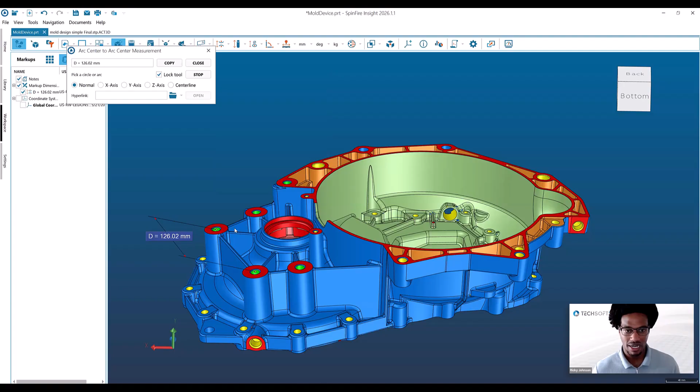So we'll start off with one of these and show how it works in SpinFire Insight. I'll do arc center to arc center. What's nice about this is that SpinFire Insight identifies the different arcs that you're hovering over. Then all you have to do is point and click to place a markup or annotation on your view, and you can do that in several locations to place whatever measurements you need.

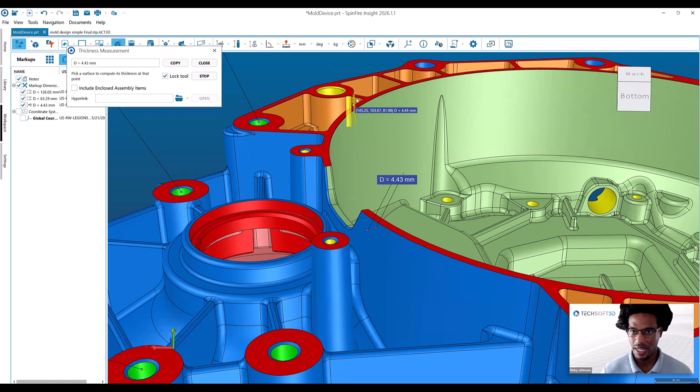Additionally, there are different operators that exist here as well that you might find interesting, such as thickness. With this, SpinFire Insight identifies parallel walls and automatically produces that distance for you. As I quickly navigate around, these numbers change to reflect what I'm currently showing, giving you a way to quickly interrogate your model without much button clicking or anything like that.

Now we have a few different annotations present on our view. What I'd like to show you is that SpinFire Insight is very configurable when it comes to the data that gets displayed within your model. Right now we're in millimeters, but you can quickly switch to inches or to other units if you'd like. You should notice that SpinFire Insight allows for mixed dimensioning, so even though these appear in millimeters, you can also show this in inches, which makes it really convenient.

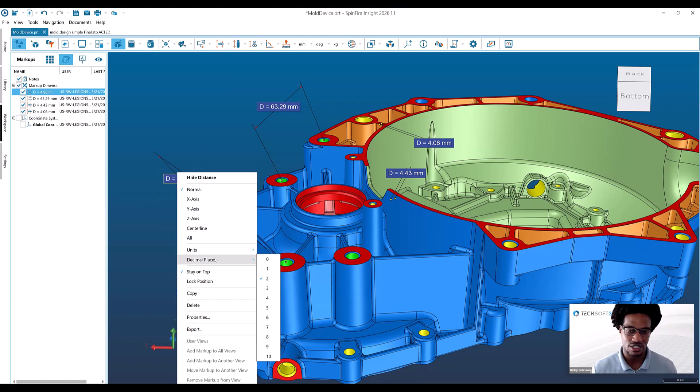Additionally, you can also change the amount of decimals that are shown. One thing I'd like to point out is that changing the decimal resolution doesn't modify the model in any way—it just influences how the data is shown on your screen. So no worries about model manipulation or changing your model in any way with SpinFire Insight.

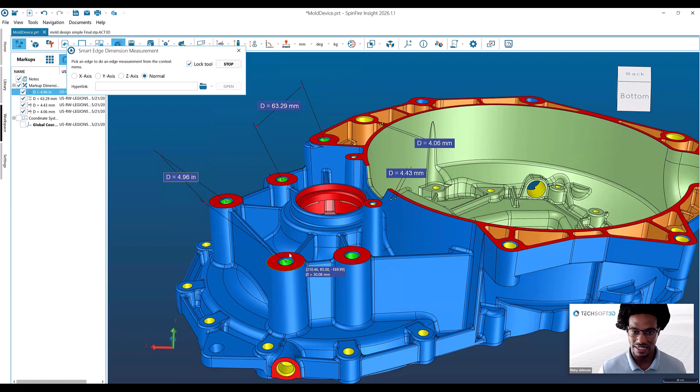One additional thing I like to show is, as we talked about how it progresses from more basic functionality to a little more advanced, I'd like to show this smart edge dimensioning. Very similar to the thickness tool we used, SpinFire Insight identifies these edges for you, and for whatever edge you'd like to show within your model, SpinFire Insight automatically identifies that and allows you to place that dimension on your screen.

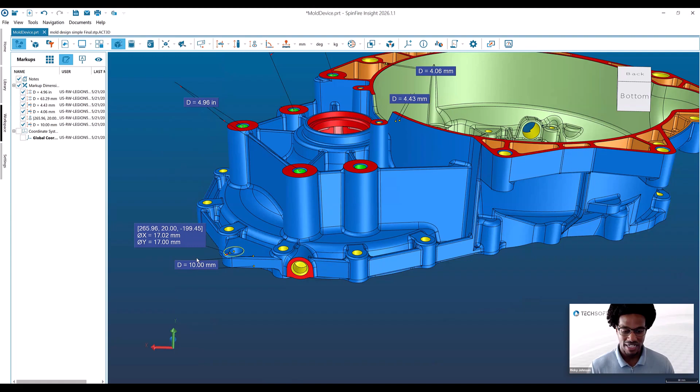So I'll just place a couple different dimensions, and also I'm going to do another thickness analysis here. Again, SpinFire Insight makes it really easy to share data amongst team members.

It also allows you to add different markups. So let's say that this thickness falls outside of our tolerance, we can specify that—falls outside of tolerance. Sorry, I spelled that wrong, but I won't correct that right now.

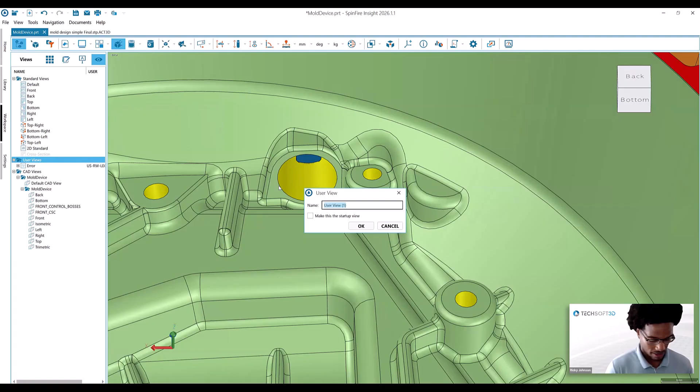What it allows you to do is specify different user views. So if you wanted to send this off to manufacturing or your designer, you can just create a new user view—we'll call that 'error' here. Then we'll navigate to a different location, and let's say we want to create a user view here as well, and we'll call this 'up to spec.'

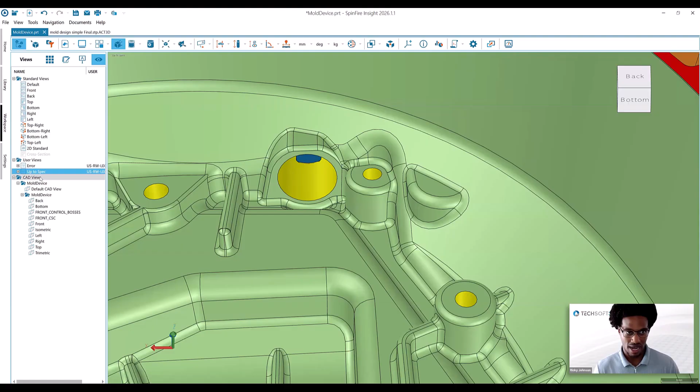Then all you have to do is save this file as an Act3D file, which right now is a PRT, but when you save it as an Act3D file, it's SpinFire's proprietary file format. You can send that off to a colleague, and all they have to do is navigate to these different user views, and they're quickly teleported to that view you'd like to specify. This eliminates a lot of miscommunication opportunities—you can give them the view exactly where you need them to be looking, eliminating some of that potential error.

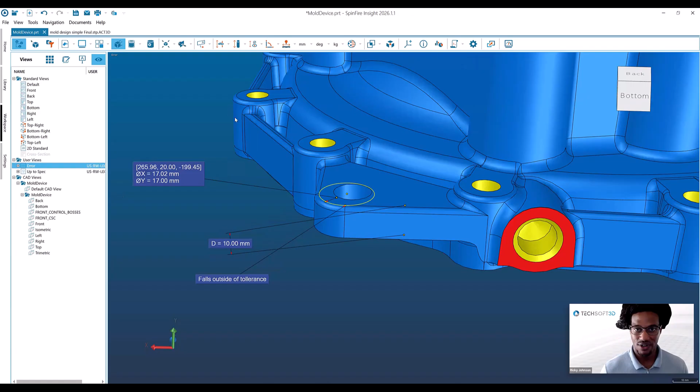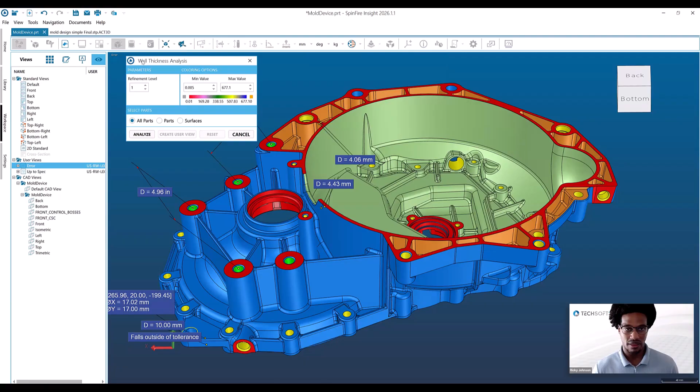To illustrate that a bit further, before I navigate to a new model, I'd like to show one more capability within SpinFire Insight. I talked about some of the measurement capabilities we have already, but SpinFire Insight also has a lot of different analysis capabilities, such as model compare, draft angle analysis, and wall thickness analysis. As you can see, we have curvature and rule-based coloring as well. I'd like to show this wall thickness analysis really quick—this is another way to visualize your data without needing to interrogate things individually.

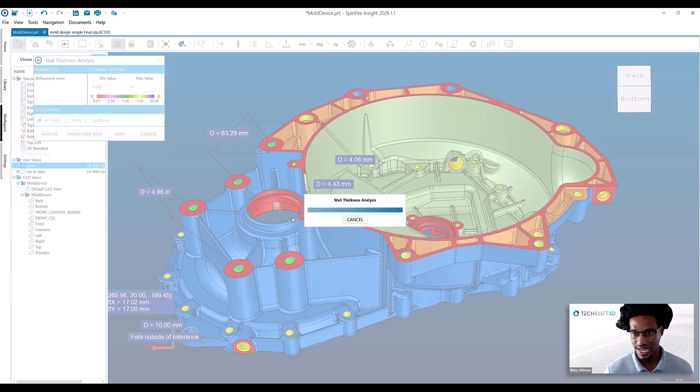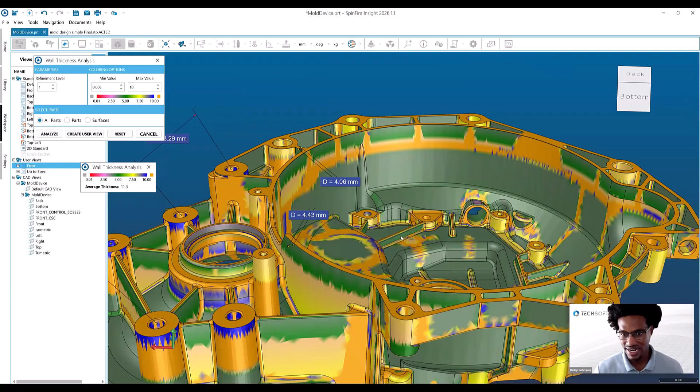This gives a very colorful way of showing your data, which can be really useful for any non-technical members of your team. It's a quick and easy way to visualize this. Once it finishes, you can see a legend pop up that lets you know the wall thickness and what color represents that thickness. So as you can see, we have some green around 5 millimeters, some orange that falls outside of our 10 millimeter window, and other colors as well. Again, without needing to be very good with SpinFire Insight, you can get a quick and comprehensive visual of some of the data within your model.

So I'm going to stop that and navigate to a different model. I mentioned how SpinFire Insight makes it very easy to share data amongst all levels of members of your team, whether engineering, executives, product manufacturers, or anything in between, without needing access to CAD licenses. This is a file that my colleague actually made.

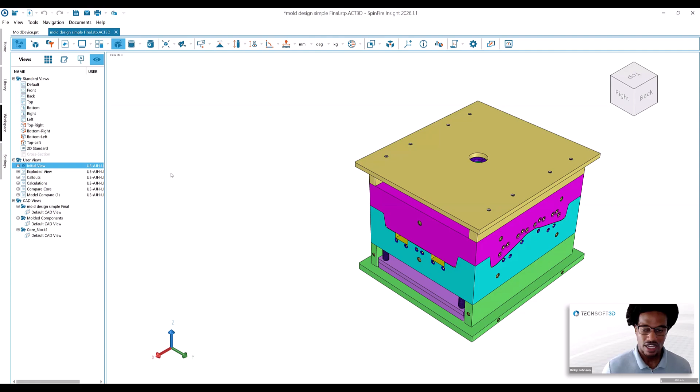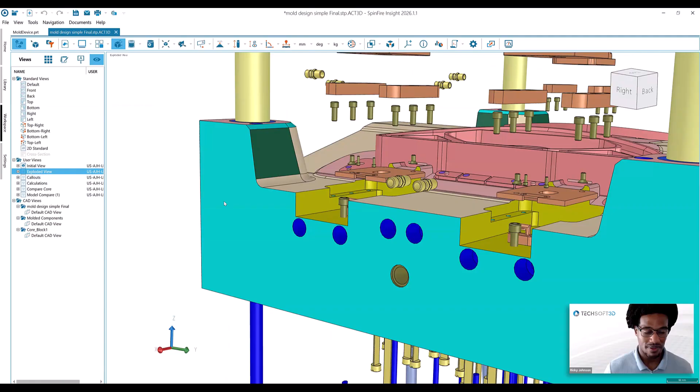He just saved it as an Act3D file and created these user views. I'd like to show some of the power of those user views and how they can be used to share data. Right now we're in our initial view, but I can go to this exploded view, and as you can see, it gives this nice exploded view, which I can then analyze myself, identify how things are put together, and interrogate my model without needing to do any manipulation myself within SpinFire Insight. That makes it really nice for people who aren't very good with CAD systems—as long as you can click a button and click between these user views, you can use SpinFire Insight to see the data you need.

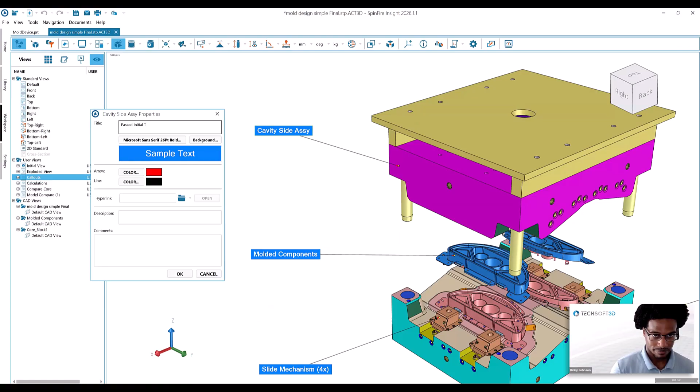Another nice thing is my colleague already created these markups, but you can go into the properties and relabel this. So we'll call this 'pass' — we can specify something like this passed initial testing, or whatever we might need to do. When we save this file and send it back, this callout will now be reflected with what we currently updated it to. I'll navigate back to our exploded view and go back to our callouts, and now you can see that it's reflected how I've updated it.

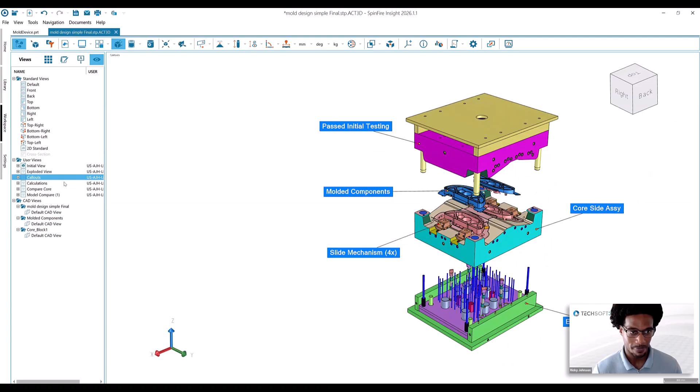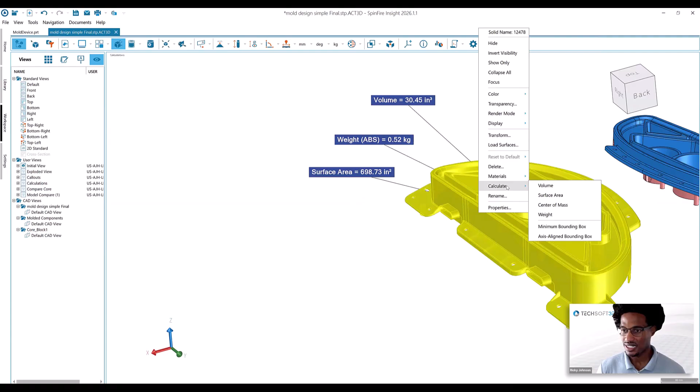Additionally, SpinFire Insight is capable of doing various calculations. You can right click, and within here you have different materials available. So if you'd like to calculate weight for a specific material—let's say this was made out of aluminum—you can do that very quickly. Additionally, there are different calculations available, such as volume, surface area, weight calculation, and more.

I'm kind of running up on time, but I'd like to show you a couple more things before I get out of here.

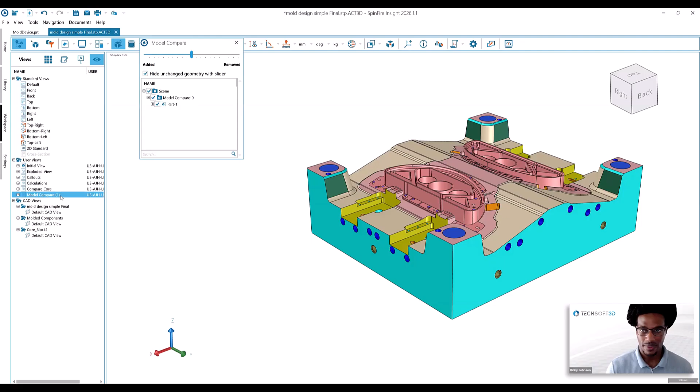Model comparison is also another very nice feature within SpinFire Insight. If you have version control for the models that get created, this model comparison tool is a great way to visualize what's changed between version 1 versus version 2, etc. Rather than running this model comparison myself, I'll show a different user view that already has model comparison enabled. That makes life very nice for sharing data, because whoever you're sharing it with doesn't have to implement this model comparison themselves—it makes it very easy for people to visualize without being very good with SpinFire Insight.

One last thing to show are these CAD importer settings. Depending on what type of data you're working with, we have presets available that work for different model types. For example, quality is basically as high as we can go, and it's recommended for small to medium models—so if model resolution is really important to you, you might load it in quality. However, if you're working with a very large model, performance loads minimal geometry and is recommended for very large models. Regardless of what type of models you're working with, we have presets available that are just clickable and easily configurable, and you can also go in and customize things as you like.

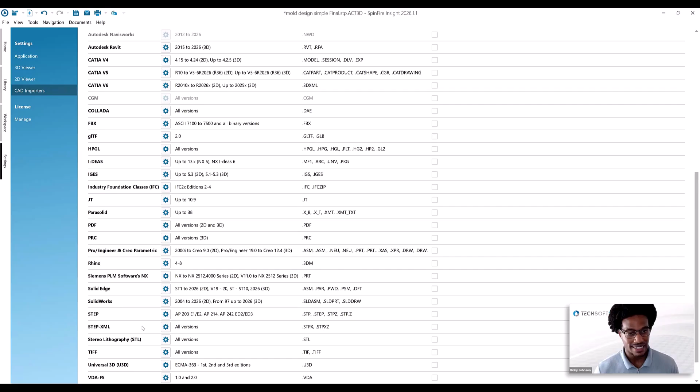Lastly, these are just all the different file formats that SpinFire Insight supports. So again, regardless of whatever models you're using, hopefully SpinFire Insight can provide some type of use to you and your team. With that, that's everything that I've got.

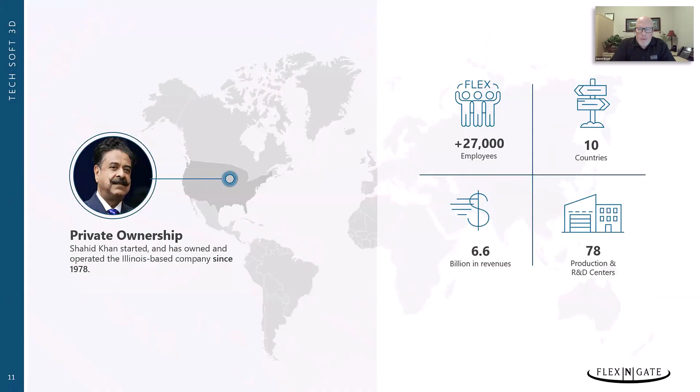Thank you, Charissa. For those not familiar with Flex-N-Gate, we're a Tier 1 automotive supplier. As you'll see in the next slide, we have around 27,000 employees globally, across around 10 countries. We're a little over $6 billion in revenue, and currently we're at 78 plants, production and R&D centers worldwide.

The next slide will show some of our footprint. You'll see we're mostly throughout the United States, but we also have a strong presence in Europe, engineering capabilities in India, and some small manufacturing in China, Japan, and Argentina.

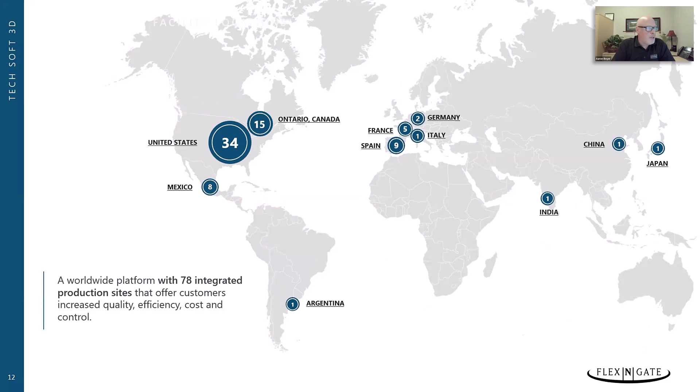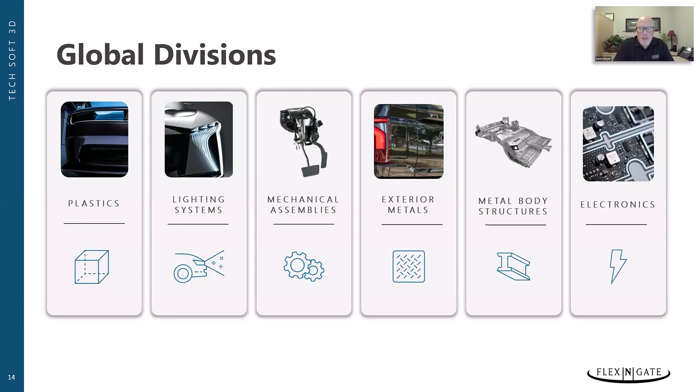And then we have an electronics division, both designing electronics as well as a small battery division that we've been developing to support the EV initiative.

The next slide here, you'll start to see some of these products, and you can see there's a lot of Class A surface on this. This is obviously a huge driver of graphics, intense CAD data that you're working with. A list of our products is on the left, but I mostly wanted you to see that it's very intense, especially on a grille or something like that, where you have a lot of small pieces of surface that cause a lot of data and graphics requirements for software.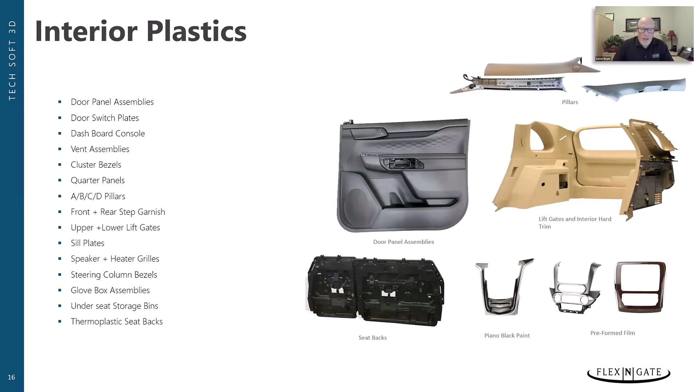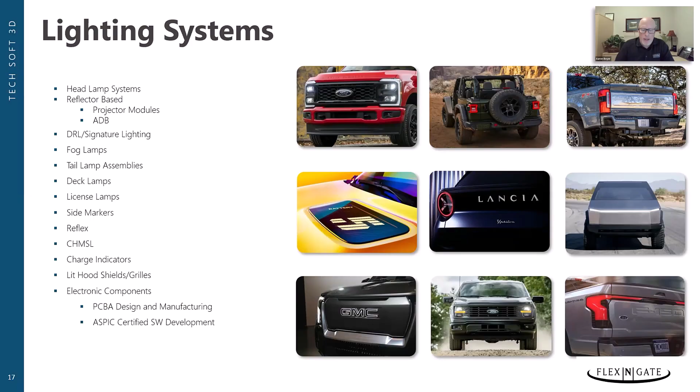And then finally, we have a lighting division shown here. I picked these three divisions to show our injection molding needs, as well as the extensive amount of data we're utilizing to view. Because not only are you looking at the data here when developing the design, but you need to know the surround data - as you're looking at a front grille or a headlamp, you need all the information around that to interface to. So we're looking for something that can handle a large amount of data very efficiently.

If we go to the next slide, we see around 25 years ago, Flex-N-Gate sought out to find a solution for this. We found SpinFire Insight and found that it was the best solution. We had tried multiple different competitors. It handles everyone's software, from NX to CATIA, which were the two primary ones we were utilizing, but also more.

AutoCAD, Creo, SolidWorks - it'll read all the step files. It reads all the different types of software you need to be able to deal with these different designs that you're working with, as well as the different versions, because you might be dealing with one customer at one version of software and another customer at a different version.

You don't have to worry about having all the different versions loaded on everyone's machine so they can view the software. The big thing it gave us was the ability to have everyone independent, engineers, designers, program managers, quoting, quality. They didn't have to go bother a designer every time they needed to review something.

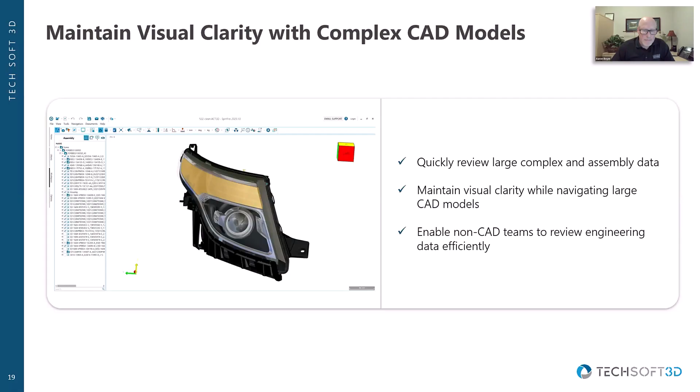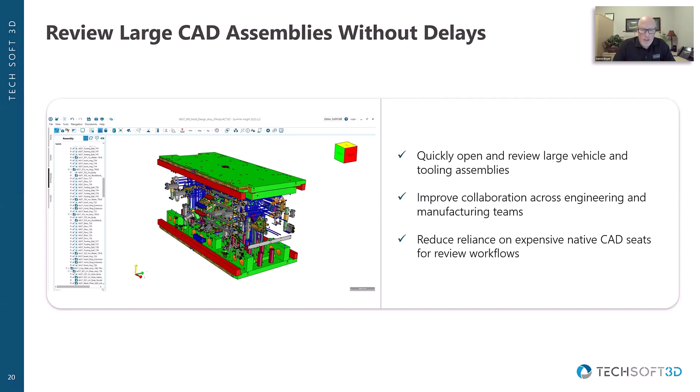But the big thing is the independence - everyone can go review this, have a meeting on it, request changes. It's really good for improving the collaboration of a team.

The next slide would show a section cut. What I wanted to show here is it's very hard to create a cross section and have it work with a strong graphics representation of what's going on. But when you cut this section, there's what's called a handle in SpinFire, and you can grab that handle right at the center and slide it back and forth.

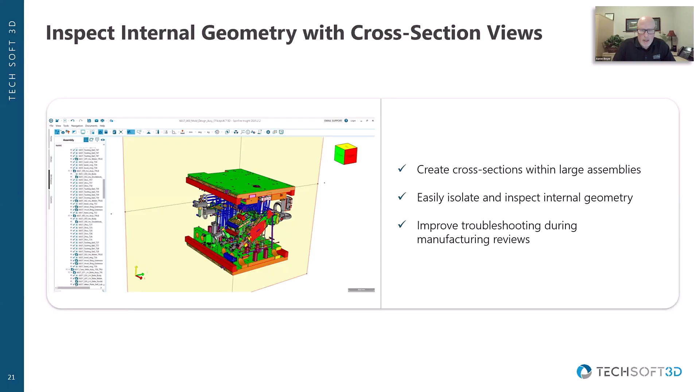So you can move your section live right through the part and analyze every little section. You can even set it to move 10 millimeters, 5 millimeters at a time, so you can look for clash conditions - all kinds of information can be extracted from this, and it's easy for everyone to use.

Another function we use quite a bit is our model compare - Ricky showed this a little bit earlier. This is an example of how we'd use it on the product end. It allows you to do a quick overlay - this would be a new version of a beauty shield that the customer had given us compared to the old version that they had.

You can see the wings are red, so the wings were removed. In a quick review, the green part shows what's unchanged, the red part was removed, and the blue is new. We can see the holes changed and something happened with the walls. This allows you to quickly make sure the changes you expected to happen occurred, and see if there are any other changes you were not expecting. You can catch those and make sure you're capturing them in your engineering change documentation.

And we take this with the changes, a screen grab of this, and keep that as a document to show what has changed, what we're expecting, what we didn't expect to see, and just verify that to make sure we capture everything that the customer is looking for.

This is an independent thing. Again, the program manager or the engineer can do this. You don't have to bother a designer to do it. Very quick, very simple. And then it might drive changes back or discussions with the customer.

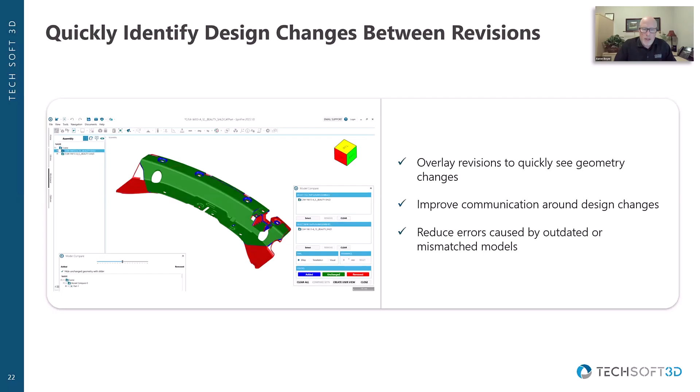Say, okay, we need this, but actually you'll see in the next slide here, we can go forward, that we did a draft analysis, and although the wall changed, where you can see a little bit of yellow there, it didn't get enough draft. So this draft analysis is a pretty powerful little tool, both for tooling engineers as well as manufacturing or engineering group, product engineer, and the CAD itself, where they can analyze their draft.

It's very versatile. You're allowed to pick a vector, so your tool vector can be determined, and it doesn't have to be specifically on an axis. You can open it up per the vector. You can set the draft requirements that you want to see, and then analyze it.

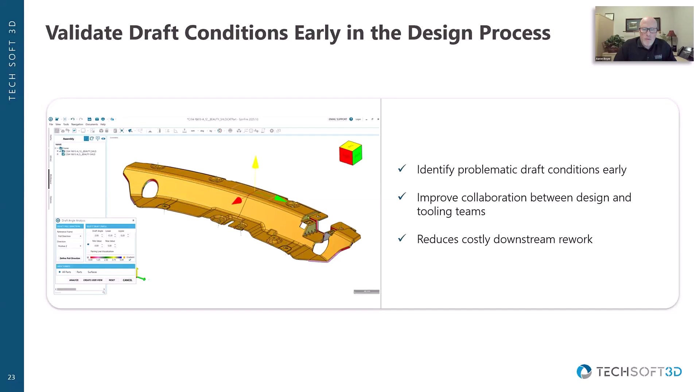And like I said here, we can see in the one area it's yellow, meaning it doesn't have enough draft, and we would need to fix that. So this is very important, to be able to catch these things before you get too far downstream and in trouble. So obviously it reduces cost downstream. Definitely, it catches your mistakes.

As well, this is good for the quality fixture group in our company, where they don't have to bother a CAD designer. They can open this up, see all the GD&T, all the information they need to build that fixture, review the fixture with the fixture builder, and be completely independent in their job.

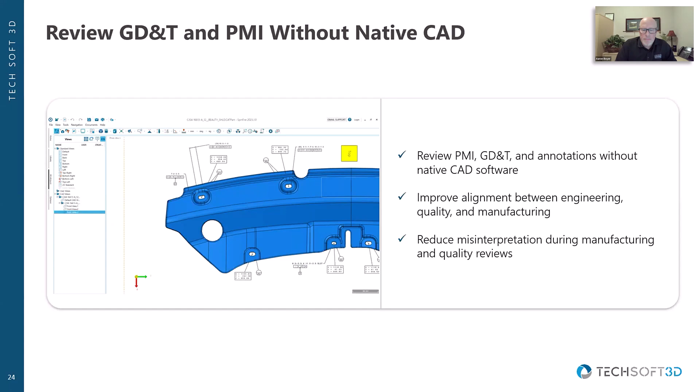So finally, SpinFire has been great for us in the ability of making everyone self-independent. They don't have to bother CAD designers. They have access to all their data. They can mark it up, send information back to the customer or into the design group to keep things flowing without having to slow down and wait for someone.

It obviously creates a lot of efficiency within the team, within the company. It makes everyone feel a little more independent, that they can get their own work done and not be dependent on someone else. And again, across the entire company, being a global company, we're dealing with customers worldwide. So it doesn't matter whose data we have to deal with, SpinFire can open that data up, and we can utilize it or do the collaborative meeting that we need to conduct.

So very strong, very powerful. Again, we've had this for over 25 years, and it's a big success within Flex-N-Gate engineering group.

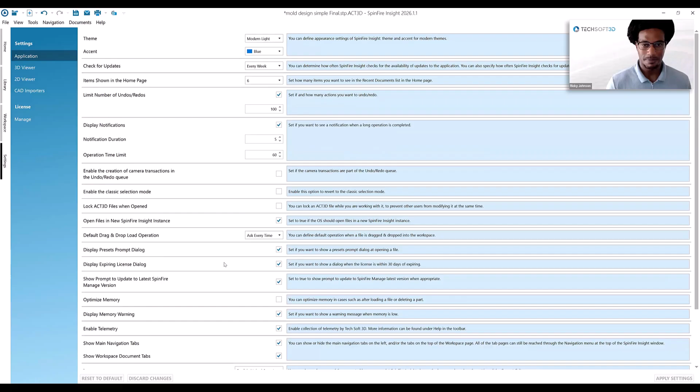If you don't mind, I'll share my screen again just to show you. So SpinFire Insight is extremely configurable. Down here, it allows you to select the different languages that you'd like to utilize. So you can set that, and your application will then reflect whatever change you specify.

Additionally, like I mentioned, it's very configurable as far as the 3D viewer goes. You can set how everything looks and functions, as well as 2D viewing as well.

And one additional thing I'd like to point out is our documentation. If you're not familiar with SpinFire Insight, we have a great documentation site that can walk you through all of the different capabilities and functionality that exists within SpinFire.

Additionally, there's this Spinny over here. We call it Spinny, it's an AI agent. So if there's any questions that you have, even if it's after this webinar, you can just ask Spinny and it will pull up direct links to show you exactly how to implement whatever question you're asking. So it's a great resource to have if you are unfamiliar with SpinFire or would just like more information about what's new and how to use it.

Thank you, Ricky. And since you are sharing your screen, in case this comes of value, there's another question that came in that I think would be great to ask you. What are some of the most valuable analysis or review capabilities mold teams tend to use inside SpinFire Insight?

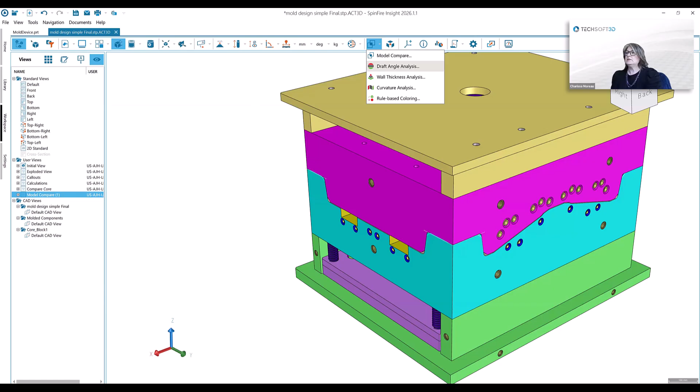So actually, this product started a new position within the company, because we had what we called a product verification technician, who would verify the data as it came in, making sure what engineering changes were expected were there, and if there was any new engineering changes that needed to occur. And so we literally generated this position around SpinFire so that the file would be read in, that model compare done, and we create a report of it.

So what generated all that was not always being able to track exactly what the customer was changing, or that changes weren't being implemented. So we actually literally developed a position on this. It was very good. Thank you, I appreciate that.

Sure, there's another question. Ricky, I think you want to share your screen for this. Yeah, so a question was asked, can you save from SpinFire Insight to different CAD formats?

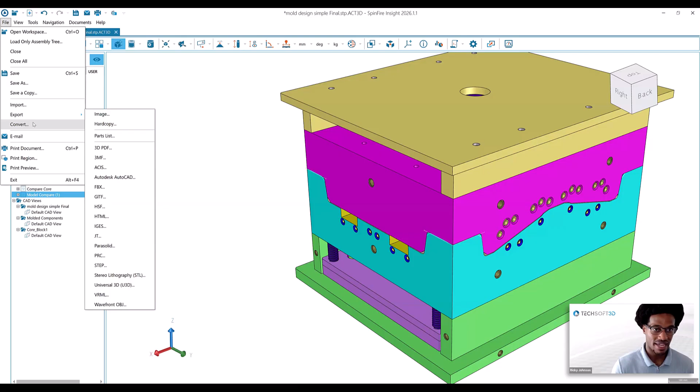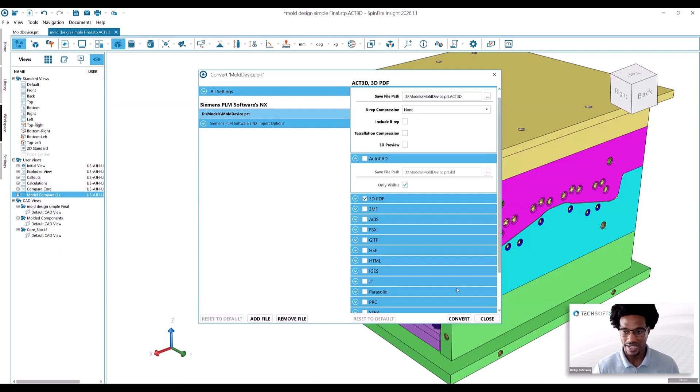And so we do have a converter here that allows you to, it will basically ask you to specify a file that you'd like to convert. And so from here, you can specify what file you'd like to export that as. And here's kind of a list of all the exports that we have available to you. You can also do this in batches as well. I believe it's up to 10 files at a time that you can do this batching process on. So if you have several files that you'd like to export to 3D PDF, for example, you can do that and convert within SpinFire Insight.

Awesome, thank you so much. I think there was one more. I can probably take this one. For organizations evaluating CAD viewers, what differentiates SpinFire Insight from others?

And I would have to say it's the fact that what we offer is the SpinFire Enterprise Bundle, where you gain unlimited access to SpinFire Insight. And this touches on what Aaron was mentioning about the different departments that would then gain access to the CAD files, whether it's engineering or quoting or procurement. It really opens up the table for who can gain access to SpinFire Insight. So thank you for that question.

And I'm not sure that I'm seeing any more. So, okay, I think that is it for today.